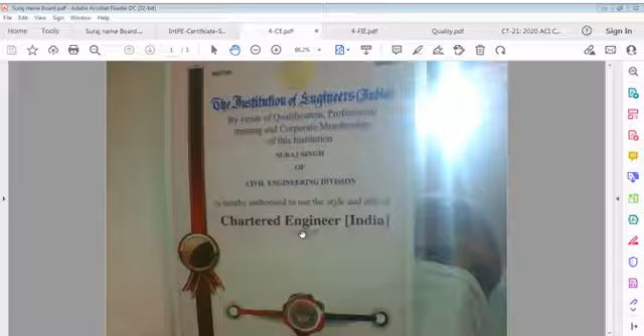Likewise, I worked here in India, Bharat, as a practicing consultant, as a writer of books, or as a communicator, whatever you can say. I have also been a consultant on arbitration mechanisms, to counsel or advise on arbitration of disputes. I have worked for many contracting companies, many EPCs. I worked in designs and engineering coordination, and I have adopted the habit of writing, thinking, and charting out procedures.

Charting out procedures is what is required in engineering, particularly in construction engineering, because construction engineering is something that is manufactured and used. It's not simply a delivered product. It is something that concrete terminology allows and involves.

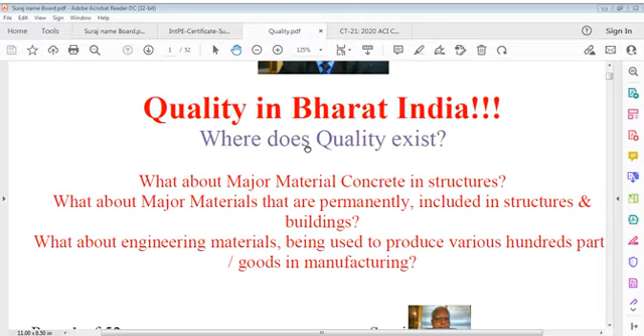So I can say this certificate is only for reference, that a person should be clear while talking to people or interacting tacitly or silently. And that's what I say, the quality of my country is important to me, and it's not my country alone. Manufacturing products, both are important, and we have to be serious about that.

When I see our country and compare it to where I worked, I find a major difference. The difference is, of course, very common, and sensible too, because of what we have developed in our working culture and what we should have. There's a difference in this. Of course, we people in this country are not backward in education, we have advanced a lot, and I should feel pride like all other citizens in my country. We developed the Gulf Cooperation Council countries.

We developed Libya. We developed African countries, particularly where civil engineering development or life development goes on. You can't compare development of Gulf and USA or England, because those cannot develop as the Middle East has developed. I find there's a difference, and it's because of funding.

You can say Middle East has got capacity to fund, and that's why they spent a lot. Particularly Gulf GCC countries - UAE, Qatar, Saudi, Kuwait, Bahrain, and whatsoever - they have enough money, enough budget, and they have spent that budget for development of their countries. Because they believe in something, they decide, they do it. But we decide only, we don't do it.

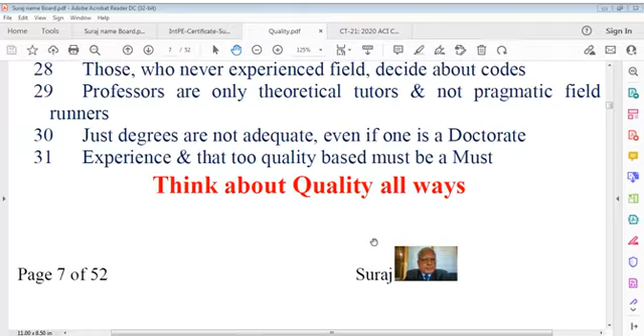And usually I put in my file always - you see, if you move this file and see - one, and I say think about quality always. Think about communication and coordination, and you have to think about everything: every action, quality, SHE, economics, contracts, products. We have to think quality in construction, quality in production.

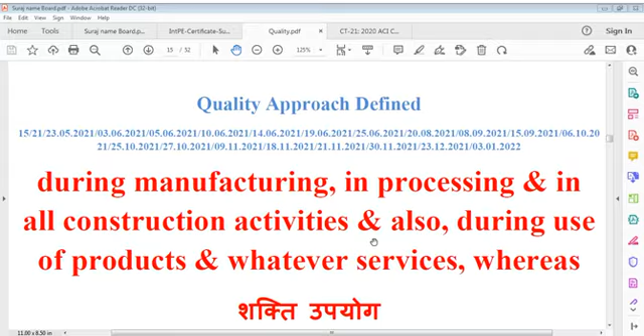SHE is required everywhere: during manufacturing, in processing, in construction activities, and also during use of products and whatever services we are, and we have to involve here with that.

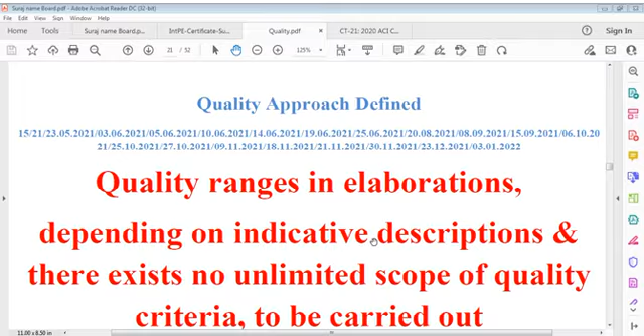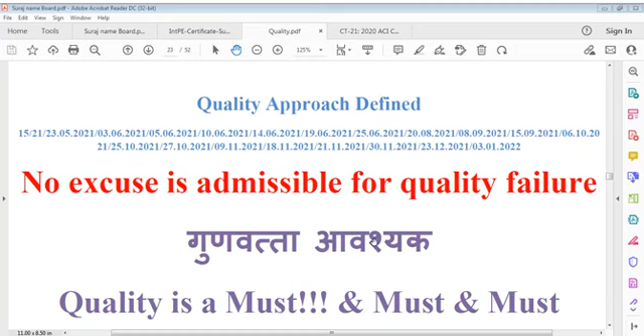Quality ranges in elaborations depending on indicative descriptions. We don't want to develop dirty, we don't want to develop through robbers or through thieves, but through engineers. And there exists no future if no quality persists. Quality's specified requirements must be met in all respects. We don't expect any excuse, we don't admit any excuse for quality failure.

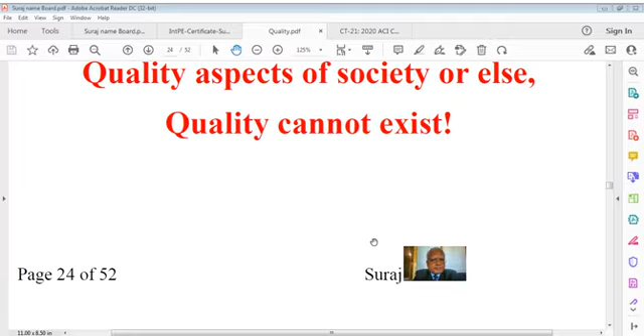Engineers must understand and realize that quality is a must. Quality is a must, and in fact, it is civil engineer who has to change, because quality aspects of society, or else quality cannot exist. I stress here civil because civil changes our life. Maybe civil engineers don't earn money, other engineers earn, but my point of view does not measure here earning capacity. It doesn't accept earning capacities criteria, but it accepts production work in construction with quality.

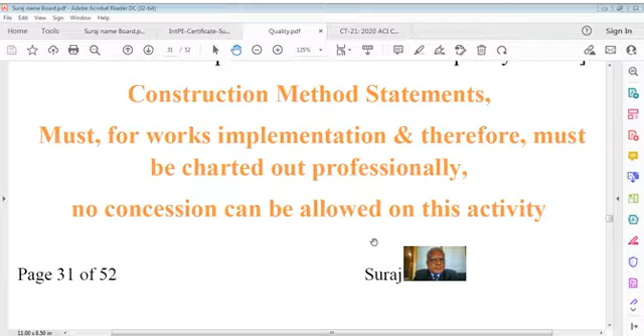And we have to chart out our ways how to achieve it, and for that we can say construction method statements also a kind of discipline for specialty or for specialization. It is a must in current world. Method statement for work, or you can say work procedure for activities, is a must, and it should tell formally about what is to be done on works, and that must be done for quality realization, or else there can be no real control on works and therefore on projects.

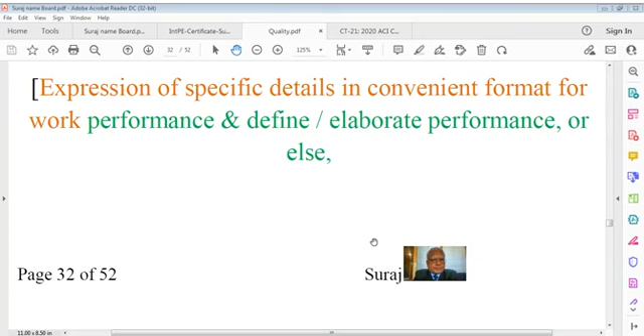We may say expression of specific details in convenient format for work performance and define elaborate performance. No work can be carried out in defined and designed sequence, and because of it output suffers, and it results in bad standards of work products. Therefore, method statement is a must, otherwise people shall do their way and it will adversely impact quality.

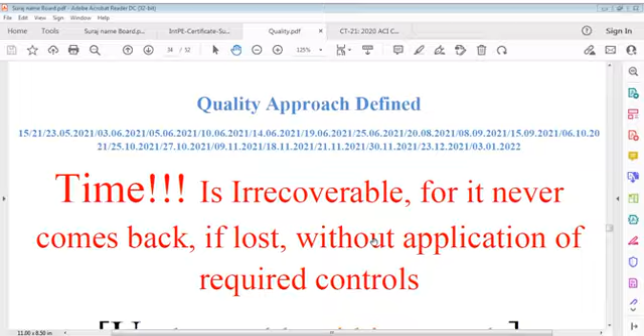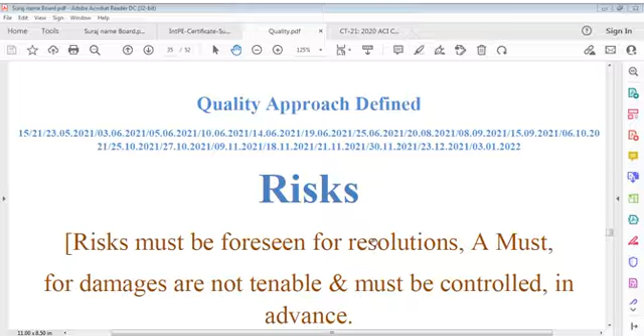And we cannot lose time, because once time goes, it can't come back, and we say time is irrecoverable, for it never comes back if it is lost without application of required controls. And cost is invariable, unchangeable. It leads to escalation if it's not properly controlled. And of course, risks are involved, which can be foreseen by experienced professionals, and we can say we can avoid damages if we can understand risk in advance.

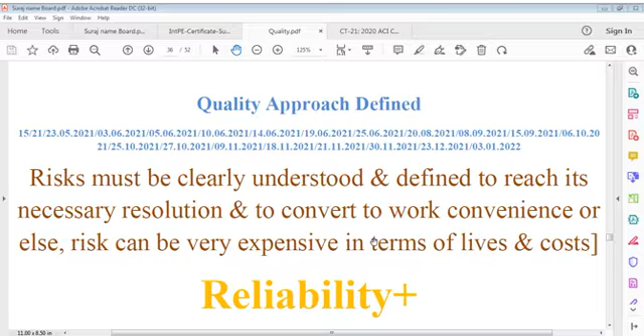And you can say inexperienced engineers may prove inefficient in viewing such risks based emergencies, and therefore thorough deliberations or brainstorming must be conducted based on available data input. Risks must be clearly understood and defined to reach its necessary resolution and convert to work convenience, or else risk can be very expensive in terms of lives and costs.

And we then say reliability, which is must to be created, we can say established. We have to establish in profession that our goods are reliable, our construction is reliable, our work is reliable, and it is very important. And it should be defined properly in our achievements, in our procedures, in our details. And we can simply write equation that reliability is equal to safety from all involved factors added by successful serviceability

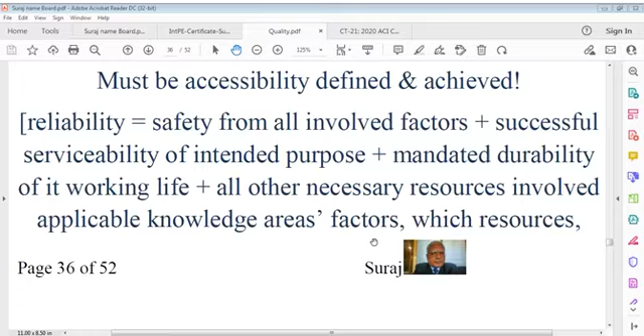of intended purpose and further added by mandated durability of its working life, and also supported by all other necessary resources involved and applicable knowledge areas, factors, which resources must be understood and achieved in all procedures, or else one should learn before taking responsibility, and all foregoing issues must be considered along with all possible risks, or else if we fail, all efforts go in vain.

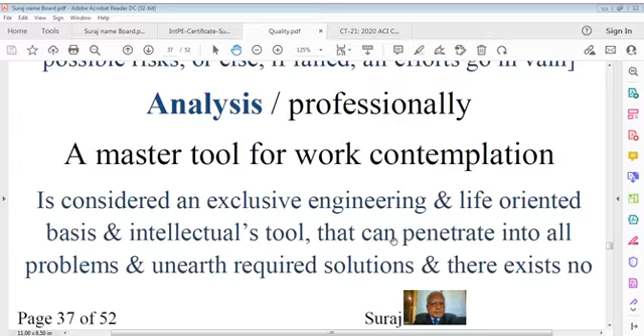That's why we say analysis is a master tool in engineering designs and in engineering construction. You can say it's professional master tool for work contemplation and is considered an exclusive engineering and life-oriented basis, an intellectual tool that can penetrate into all problems and unearth required solutions. There is no way from where or through which analysis approaches could be avoided. It's a must to understand all problems, and we can then, after solutions, connect these problems, mix them, join them,

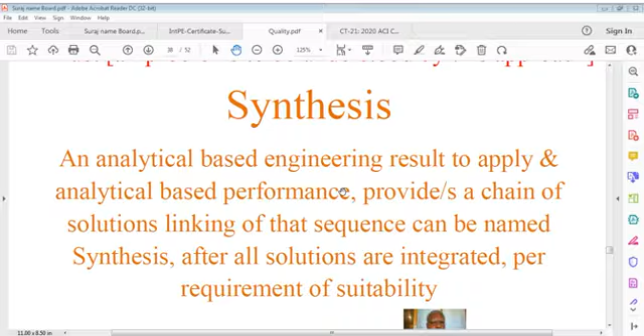and that's called synthesis. An analytical based engineering result, that is synthesis, to apply. An analytical based performance provides a chain of solutions, linking of which or that sequence can be named synthesis. After all, solutions are integrated by requirement of suitability.

Then I can say thinking - in Hindi also written, but thinking and concentration, which I was referring to, thinking and concentration are certain powers to achieve everything, valued, unlimited, and the only exclusive way for reaching solutions.

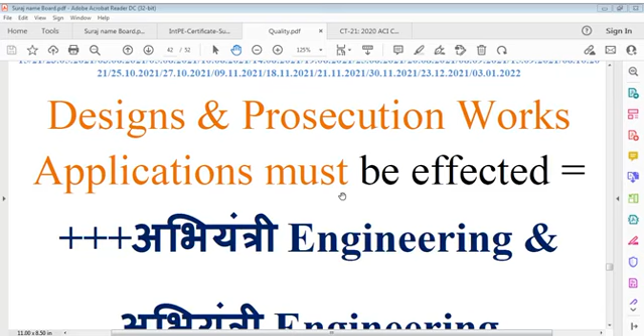Thinking based on contemplation again and again must be achieved. That's what it says - design and prosecution works, applications must be effected. Engineering and business are the yoke, but quality non-conformance product is called substandard and therefore rejected because it's against engineering

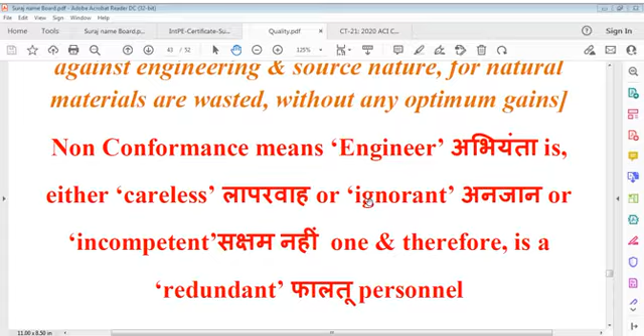and source nature, for natural materials are wasted without any optimum gains. Non-conformance means the engineer is either careless, to be very frank, or ignorant, or incompetent, and therefore redundant personnel.

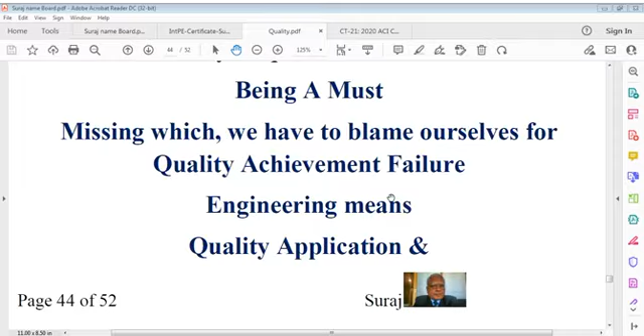We must change to meet requirements to achieve intended quality standards for universal recognition of products or goods. Therefore, quality requirements checks must be made, missing which we have to blame ourselves for quality achievement failure. Engineering means quality application and continuous improvement of quality.

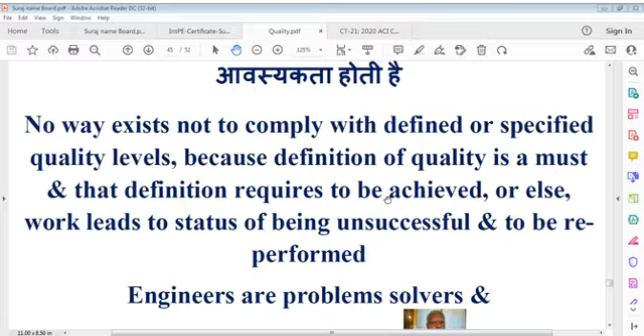There exists no way not to comply with defined or specified quality levels, because definition of quality is a must, and that definition requires to be achieved, or else work leads to a status of being unsuccessful and has to be reperformed.

Engineers are problem solvers and not problem creators. They are problem developers, work developers, agents of change. And the main point here is an engineer can change - an engineer can convert a forest or a desert to a city or an industrial town, for which quality, safety, health and environment play integrated and vital roles in all respects.

Quality can never be and must not be compromised by engineers and public, and if done without quality, one has acted against the profession and nature.

And that's why I say communication and coordination are the most significant disciplines and subjects, we can say. Without communication and without coordination, which is in sequence of communication, these are the most significant disciplines, and we must understand them.

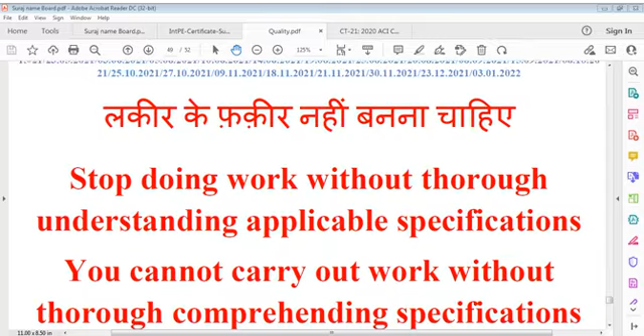Specifications we have to understand, we have to write, we have to define, otherwise we cannot do anything. We say, stop doing work without thorough understanding of applicable specifications - we cannot carry out work without thoroughly comprehending specifications.

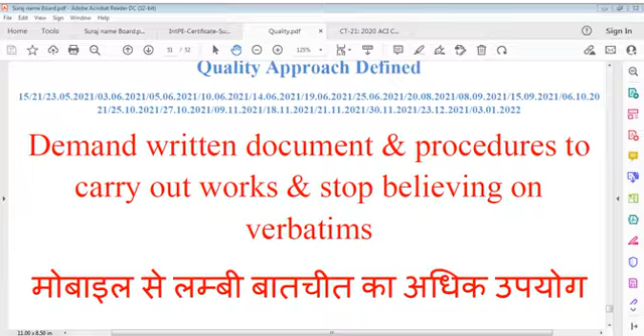Demand written document, and procedures to carry out works, and stop believing on verbatim instructions.

And here is that - what about quality in our country? There can be many questions raised, and we say material of course is important. What resources we employ for doing work are also important, very important. What sort of workers, what sort of professionals we employ also is very important.

Every resource we use should be important. What sort of design we have done is also important. There are so many areas of importance in engineering. If you sum up all that importance, you will find quality.

Now it depends what type of material we are using. And here I can say, I consider efforts of professionals - efforts done by engineers, efforts done by engineering staff, efforts done by workers on site. Everybody has a role in works, and I consider this role, these efforts, these activities they perform also as material.

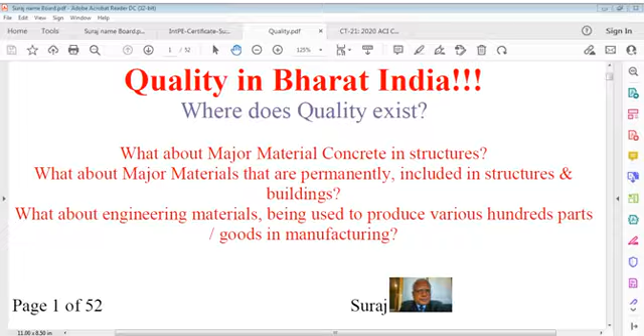We have to answer questions like: what about major material, concrete, in structure? What about major materials permanently included in structures and buildings? What about engineering materials used to produce various parts and goods in manufacturing? What provision does government make to force productions and constructions to be delivered with quality compliance? What's the reason quality requirement is being ignored by this nation, or our nation? What reason exists that engineers are not able to conduct the required role forward towards the quality domain?

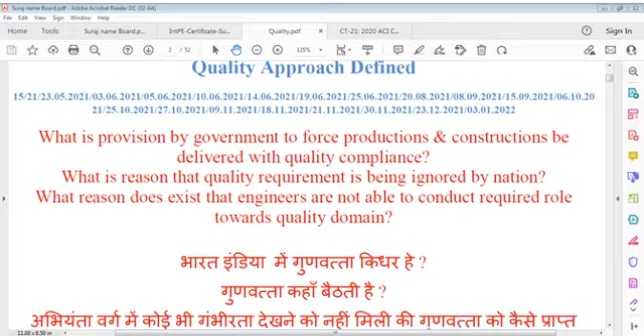No seriousness has been observed among engineers from all branches about quality requirement, with no known reason. Zero signals at this moment. I am not sure.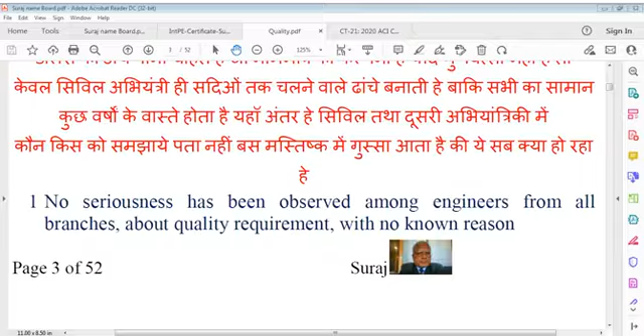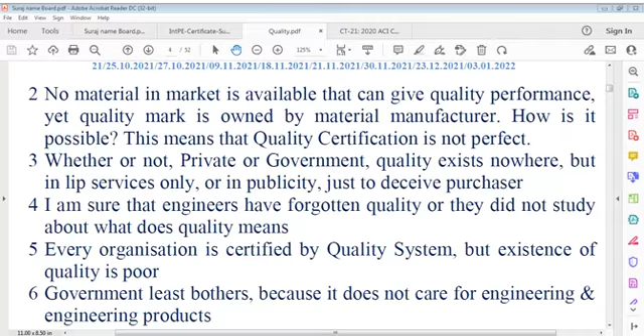No seriousness has been observed among engineers from all branches about quality requirement, with no known reason. No material in the market is available that can give quality performance, yet the quality mark is owned by material manufacturers. How is it possible? This means quality certification is not perfect.

Whether private or government, quality exists nowhere. Don't consider sector only - in private sector, in government sector, quality exists nowhere. But in lip service it exists: 'I can do it, I shall do it.' It is easy to say, but when you actually do it, your lips are tight and closed.

Reliability goes to publicity. Reliability goes to lip service. Reliability goes only to advertisement. And that is what I say - if you want to deceive the consumer or purchaser, you spend money on advertisements and publicity, which does not result in anything, and we can say the money goes into water.

It goes to waste. And I am sure that engineers have forgotten quality, or they did not study, you can say. Even if they studied, they forgot it. About what does quality mean?

What does quality mean? Every organization is certified formally, but if it doesn't produce a quality product, that certificate is just a piece of paper or a soft copy, nothing else.

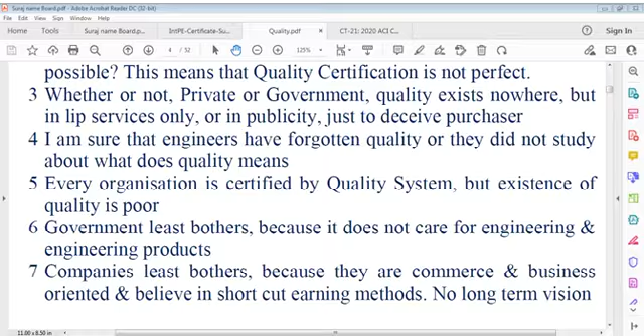The problem is no one bothers. If you consider government or state, it doesn't bother. If you consider personnel in companies, organizations, or institutions, they too do not bother. If they do not bother, who bothers? The suffering of quality bothers. Professional engineers never bother because they have gotten no independent standing, and are unable to fight against it.

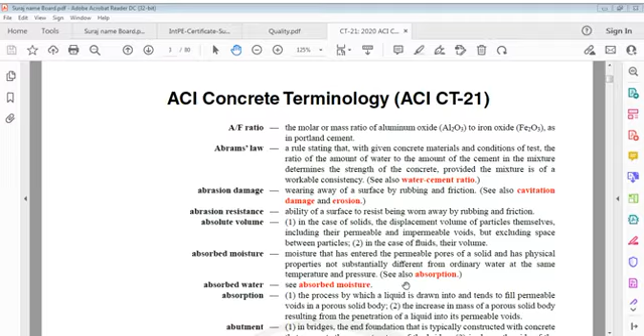So many points can be discussed in this, but I'm not interested to read them all. My interest goes to the concrete terminology that I discussed till now.

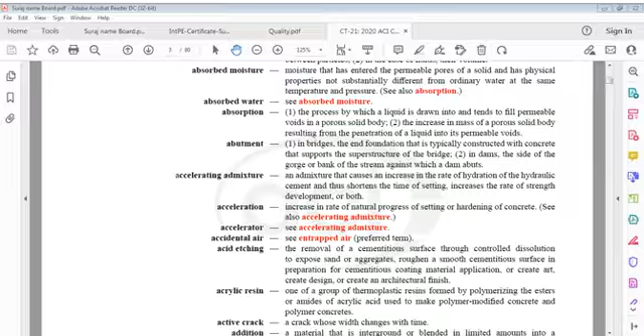We discussed about many items: A/F ratio, Abrams' law, abrasion damage, abrasion resistance, absolute volume, absorbed moisture, absorbed water, absorption number. If I'm not wrong, where we were, I have to be specific about that.

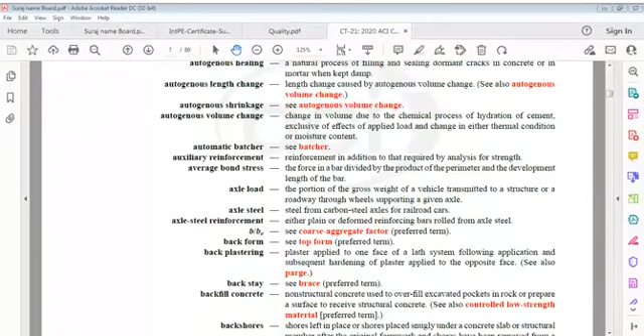It was a good discussion in these papers, for concrete is a very significant part of engineering work, and we have to do it. It is really very interesting, to some extent.

Let me blow it up first. I'll keep it better so we can see it better, let's say 170, 180, as much as better it is.

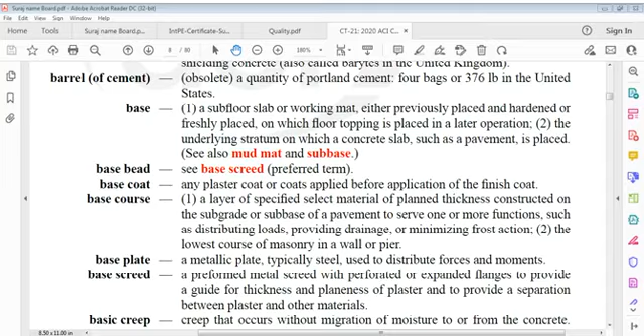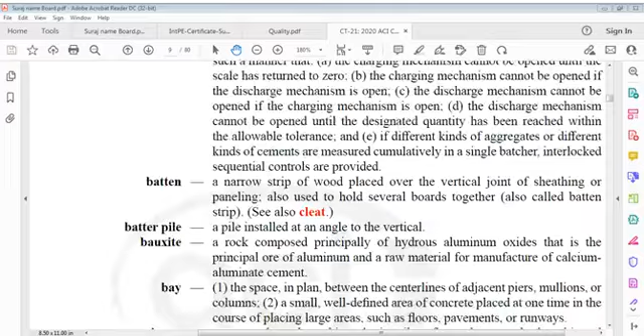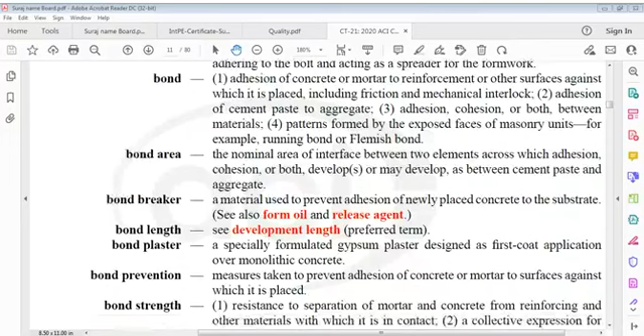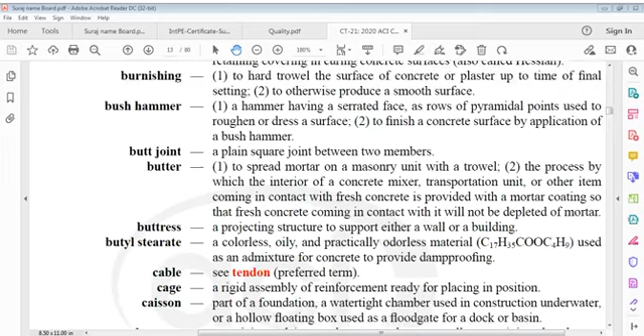Broadcast, boom, burnish, bush hammer, calcine, butter, bundled bars, burnishing, bush hammer, butt joint, buttress, cable, cage, caisson.

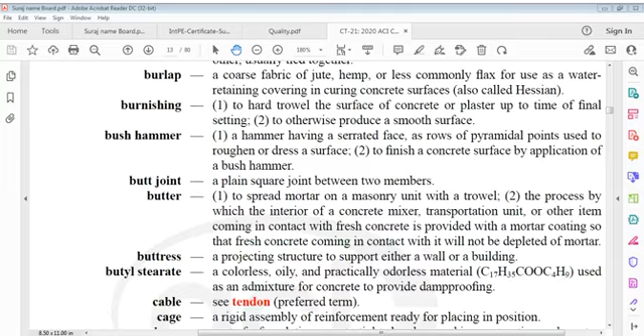No, this we did not do - calcium. So let's say here, burlap, butter. Let's think - bulking, we did bulking with the bulking factor, bull float, bundled bars, burnishing. Cable, cage, alright, let's start here with butt joint, bush hammer, burnishing - what is bundle bar?

Bundle bars: a group of not more than 4 parallel reinforcing bars in contact with each other, usually tied together.

Burlap: a coarse fabric of jute, hemp, or less commonly flax, used as a water retaining covering in curing concrete surfaces. It's also called Hessian. So we had talked about this.

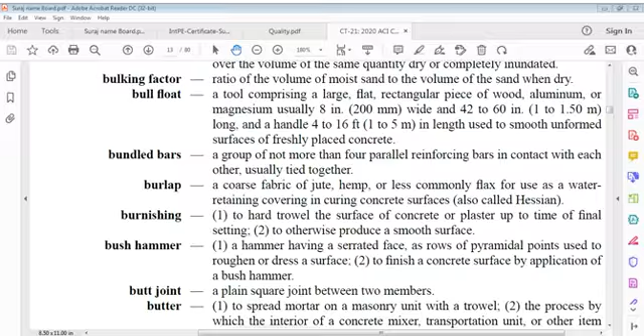Just refreshing - burnishing: hard troweling the surface of concrete or plaster up to the time of final setting.

Bush hammer: a hammer having a serrated face with rows of pyramidal points, used to roughen or dress a surface. To finish a concrete surface by application of a bush hammer.

Butt joint: a plain square joint between two members. And butter: to spread mortar on a masonry unit with a trowel.

Buttering is the process by which the interior of a concrete mixer, transportation unit, or other item that comes in contact with fresh concrete is provided with a mortar coating, so that the fresh concrete coming in contact with it will not be depleted of mortar.

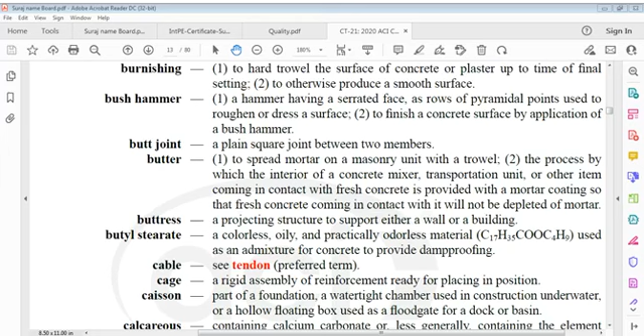A buttress is a projecting structure to support either a wall or a building. Butyl stearate: a colorless, oily, and practically odorless material, C17H35COOC4H9, used as an admixture for concrete to provide damp-proofing.

Cable is a tendon, and cage is a rigid assembly of reinforcement ready for placing in position. That is cage.

Cable is a tendon, then cage is an assembly of reinforcement used in construction, and now caisson is part of a foundation.

Caisson: a watertight chamber used in construction underwater, or a hollow floating box used as a floodgate for a dock or basin.

Calcareous: that which contains calcium carbonate, or less generally containing the element calcium.

Calcine: to alter composition or physical state by heating below the temperature of fusion. And calcite is a mineral having the composition calcium carbonate.

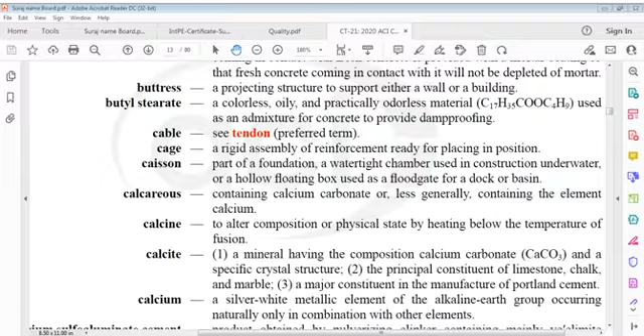Calcite is a mineral having composition calcium carbonate, CaCO3, with a specific crystal structure. It is the principal constituent of limestone, chalk and marble, and a major constituent in the manufacture of Portland cement.

Calcium: a silver white metallic element of the alkaline earth group, occurring naturally only in combination with other elements. We may also mention calcium sulfoaluminate cement.

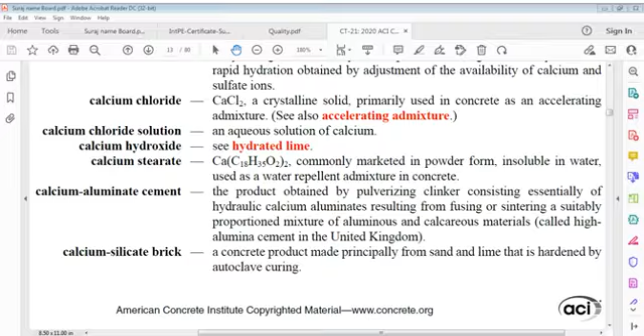Calcium stearate is a water repellent admixture in concrete, commonly marketed in powder form, insoluble in water, used as a water repellent admixture in concrete.

Calcium aluminate cement: a product obtained by pulverizing clinker consisting essentially of hydraulic calcium aluminates, resulting from fusion or sintering a suitably proportioned mixture of aluminous and calcareous material, also called high alumina cement.

Calcium silicate brick: a concrete product made principally from sand and lime, that is hardened by autoclave curing.

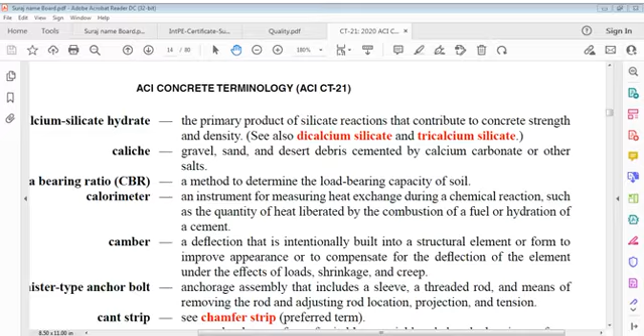Calcium silicate hydrate: the primary product of silicate reactions that contribute to concrete strength and density. Also dicalcium silicate and tricalcium silicate.

Let me see the full page, I'm just finding a little different.

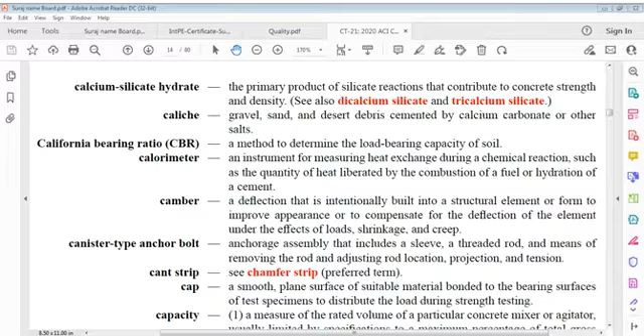Cant strip, chamfer strip, cap strip. Cap is a smooth, plane surface of suitable material bonded to bearing surfaces of a test specimen, to distribute load during strength tests. We use sulfur caps before testing cores.

Likewise, that is capacity. A measure of the rated volume of a particular concrete mixer or agitator, usually limited by specifications to a maximum percentage of total gross volume.

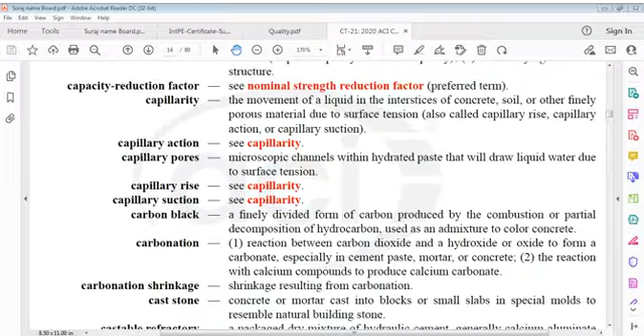Carbonation shrinkage results from carbonation. Cast stone is concrete or mortar cast into blocks or small slabs in special molds to resemble natural building stone.

Castable refractory is a packaged dry mixture.

I must touch my leg. It's a big problem sometimes. Touching a leg is also a problem sometimes.

Carbonation shrinkage resulting from carbonation. Cast stone: concrete or mortar cast into blocks or small slabs in special molds to resemble natural building stone.

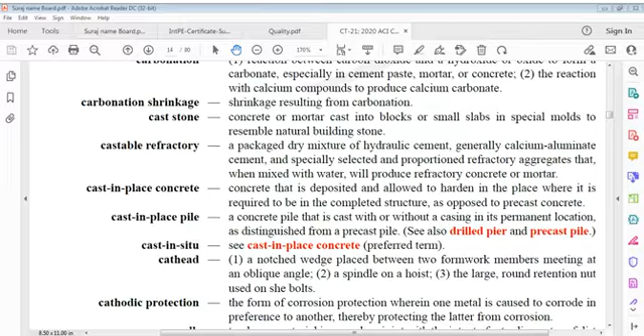Cat head: a notched wedge placed between two formwork members meeting at an oblique angle, a spindle on a hoist, or a large round retention nut used on bolts.

Cathodic protection is a form of corrosion protection wherein one metal is caused to corrode in preference to another, thereby protecting the latter from corrosion.

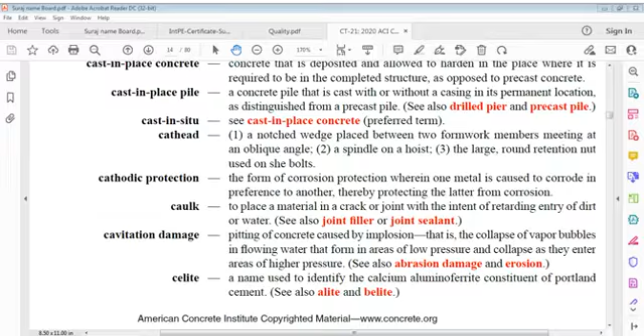Cavitation damage: pitting of concrete caused by implosion, that is collapse of vapor bubbles, in flowing water that form in areas of low pressure and collapse as they enter areas of high pressure.

Celite, a name used to identify calcium aluminoferrite, a constituent of Portland cement. Cavitation damage is pitting of concrete caused by implosion, that is collapse of vapor bubbles in flowing water that form in areas of too low pressure and collapse as they enter areas of high pressure.

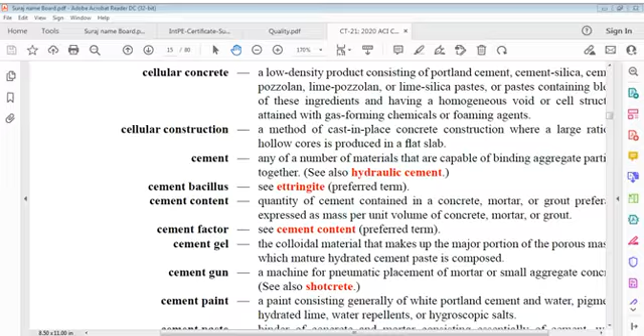Celite, that is. Cellular concrete. Let me just check it's positioned this way. Yeah, that's okay. It says cellular concrete.

I'll relax for one minute. Sometimes we have to relax, otherwise it's difficult to survive. Sometimes it's very important that we relax, otherwise it becomes an issue.

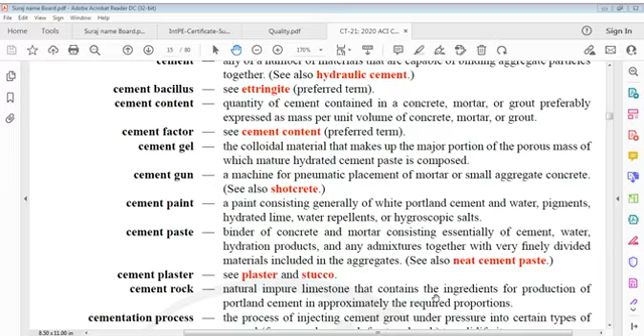Let's go. So cement is any of a number of materials capable of binding aggregate particles, and we've discussed cement content, cement factor, cement gel. Cement gel is a colloidal material, gel, just like toothpaste we say it's gel, that makes up the major portion of the porous mass of which mature hydrated cement paste is composed.

Cement gel is very easy to define: you can say it's a colloidal material that makes up the major portion of the porous mass of which mature hydrated cement paste is composed.

Cement gun: a machine for pneumatic placement of mortar or small aggregate concrete.

Cement paint is a paint consisting generally of white Portland cement and water, pigments, hydrated lime, water repellents, or hygroscopic salts.

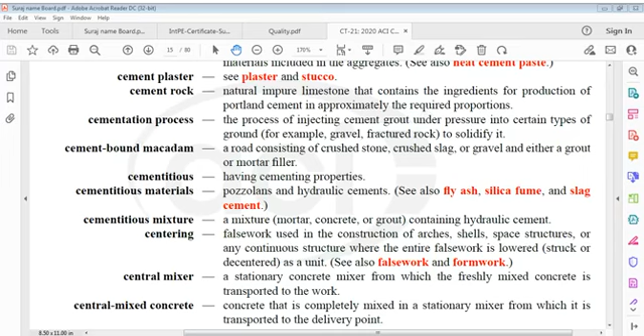Central mixer: a stationary concrete mixer from which freshly mixed concrete is transported to the work. Central-mixed concrete: concrete that is completely mixed in a stationary mixer from which it is transported to the delivery point.

Centrifugal process: a process for producing concrete products such as pipe, using an outer form that is rotated about a horizontal axis, into which concrete is fed by conveyor, also called the spinning process. Related terms include centrifugally cast concrete, dry cast process, packer head process, damp process, and wet cast process.

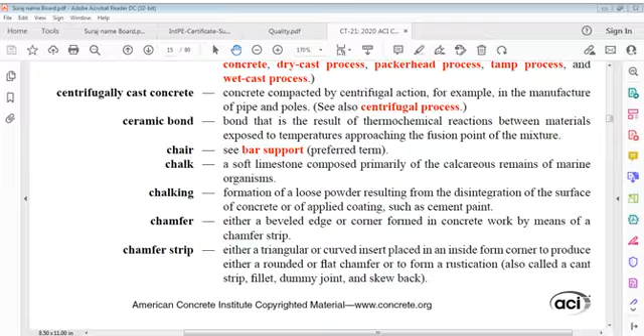Charge: to introduce, feed, or load materials into a concrete or mortar mixer, furnace, or other container or receptacle where it will be further treated or processed. This is called the charge material, feed material, load material, or introduced material. This is the terminology used for concrete mixer or mortar mixer, and whatever processing you can say.

Checking: development of shallow cracks at closely spaced but irregular intervals on the surface of plaster, cement paste, mortar, or concrete.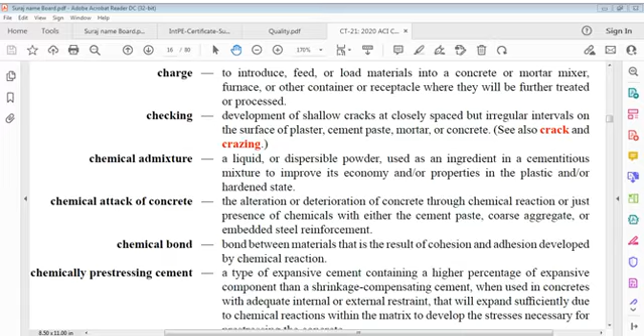Chemical bond between materials is the result of cohesion and adhesion developed by chemical reaction. So let's process: chemical attack on concrete, then chemical bond.

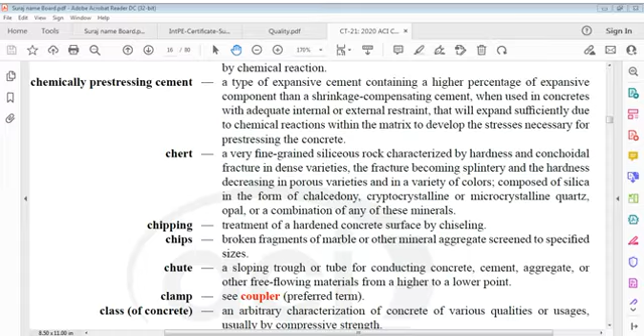Chemically pre-stressing cement: a type of expansive cement containing a higher percentage of expansive component than a shrinkage compensating cement. When used in concrete with adequate internal or external restraint, it expands sufficiently due to chemical reactions within the matrix to develop the stress necessary for pre-stressing concrete.

Chemically pre-stressing cement again: a type of expansive cement, not money-wise but expansion-wise, containing a higher percentage of expansive component than a shrinkage compensating cement. When used in concrete with adequate internal or external restraint, it will expand sufficiently due to chemical reactions within the matrix to develop the stress necessary for pre-stressing concrete.

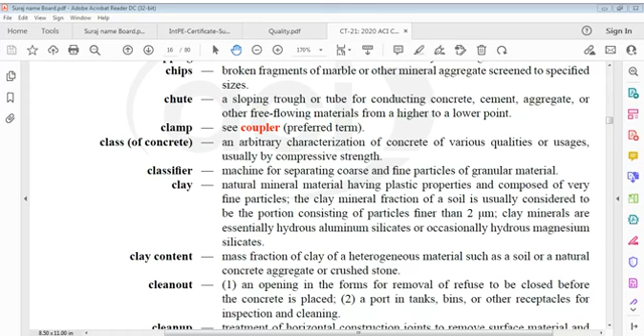Clean out: an opening in the form for removal of refuse, to be closed before concrete is placed, or a port in tanks, bins or other receptacles for inspection and cleaning.

Clean up: treatment of horizontal construction joints to remove surface material and contamination down to a condition of soundness corresponding to that of a freshly broken surface of hardened concrete.

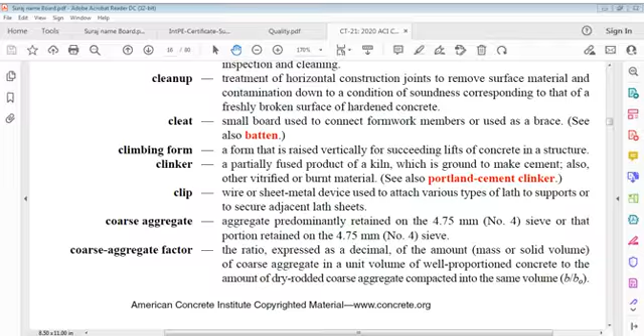Okay, a little disturbance there, but I'm back. That was coarse aggregate factor. Now we move to coarse grained soil. What is coarse grained soil? It is soil in which larger grain sizes such as sand and gravel predominate.

Coat is a film or layer, as of paint or plaster, applied in a single operation. Coated bar is a bar on which a coating has been applied, usually to increase resistance to corrosion.

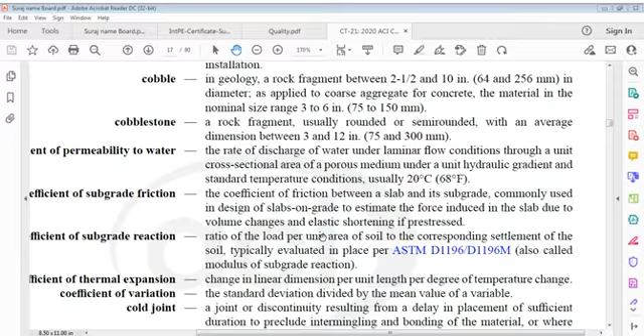Here again, some problem. Coefficient of permeability to water: rate of discharge of water under laminar flow conditions through a unit cross sectional area of a porous medium under unit hydraulic gradient and standard temperature conditions, that is 20 degrees Celsius usually.

That is called coefficient of permeability to water at 20 degrees - the discharge of laminar flow water through a unit cross sectional area of porous material under unit hydraulic gradient and 20 degrees Celsius temperature, normally.

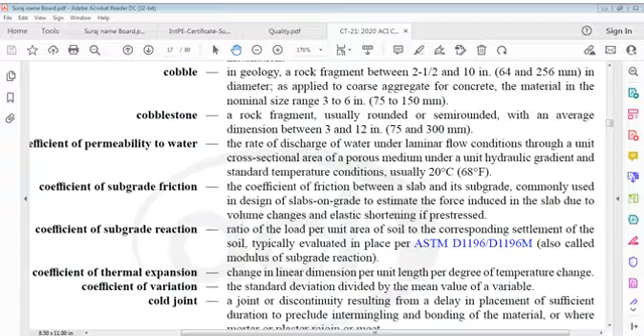Cold joint: a joint or discontinuity resulting from a delay in placement of sufficient duration to preclude intermingling and bonding of material, or where mortar or plaster rejoin or meet.

Cold strength: compressive or flexural strength of refractory concrete determined before drying and firing.

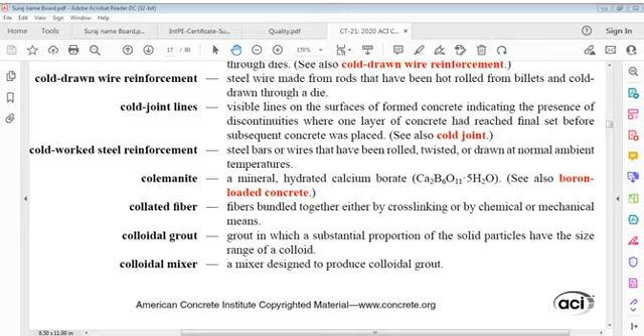Color hardener: similar to a traditional one-component hardener, having additional constituent materials formulated to color the concrete surface.

Colorimetric value: an indication of the amount of organic impurities present in fine aggregate.

Column: a member with ratio of height to least lateral dimension exceeding 3, used primarily to support axial compressive load.

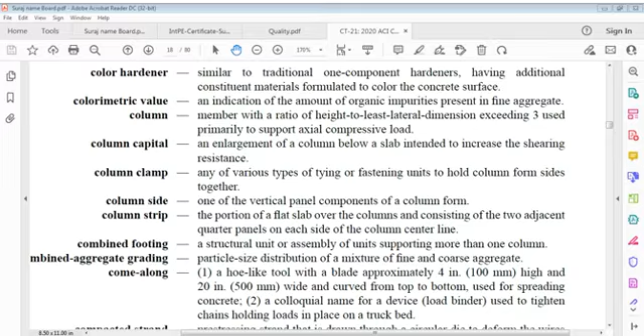Combined aggregate grading: particle size distribution of a mixture of fine and coarse aggregate.

Come along: a hoe-like tool with a blade approximately 100 mm high and 500 mm wide, curved from top to bottom, used for spreading concrete. Colloquially, it's also a name for a device, load binder, used to tighten chains holding loads in place on a truck bed.

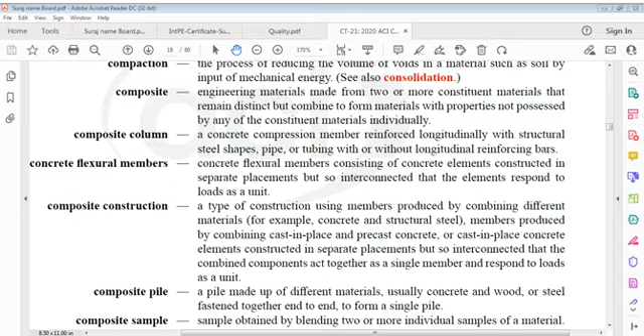Composite pile. A pile made up of different materials, usually concrete and wood or steel, fastened together end to end to form a single pile.

Composite sample. Sample obtained by blending two or more individual samples of material.

Compression flange. Widened portion of an I-beam or similar cross-sectional beam that is compressed by bending under normal loads.

Compression member. The compression member in which primary stress is longitudinal compression.

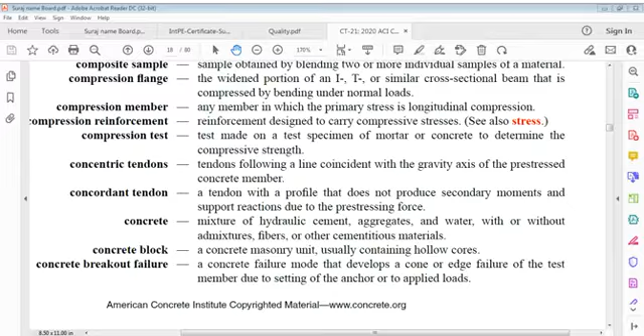Concrete breakout failure. A concrete failure mode that develops a cone or edge failure of a test member due to setting of an anchor or applied loads.

Concrete brick. Solid concrete masonry units of relatively small prescribed dimensions and concrete compressive strength.

Measured maximum resistance of a concrete specimen to axial compressive loading, expressed as force per unit cross-sectional area.

Concrete containment structure. A composite concrete and steel assembly that is designed as an integral part of a pressure retaining barrier that in an emergency prevents release of radioactive or hazardous effluents from nuclear power plant equipment enclosed therein.

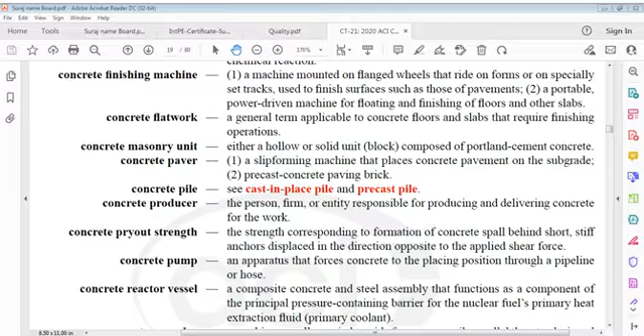Now, concrete finishing machine, mounted on flanged wheels so that it rides on forms. Sorry, concrete spreader - I think I was doing that wrong.

Concrete spreader, a machine usually carried on side forms or on rails parallel thereto, designed to spread concrete from heaps already dumped in front of it, or to receive and spread concrete in uniform layers.

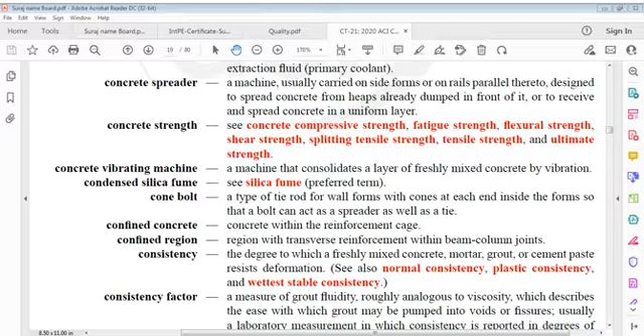Consistency factor: a measure of grout fluidity, roughly analogous to viscosity, which describes the ease with which grout may be pumped into voids or fissures. Usually a laboratory measurement in which consistency is reported in degrees of rotation of a torque viscometer in a specimen of grout.